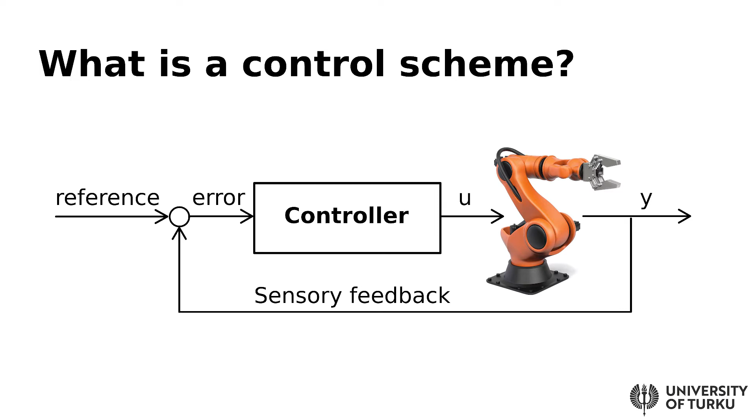The controller, by means of sensors, constantly monitors the robot's motion and compares it with the reference. Based on this difference, which we call error, the controller defines the electrical signals that should be sent to the robot's motors in order to allow the desired motion to be performed. That's how the trick works.

But let's take a look at this specific case. This type of robot usually works in what we call a well-structured environment. It performs repetitive tasks, protected in a cage, without interacting with humans, and with almost no disturbances at all. I mean, here everything is well known, and there's no space for the element of surprise.

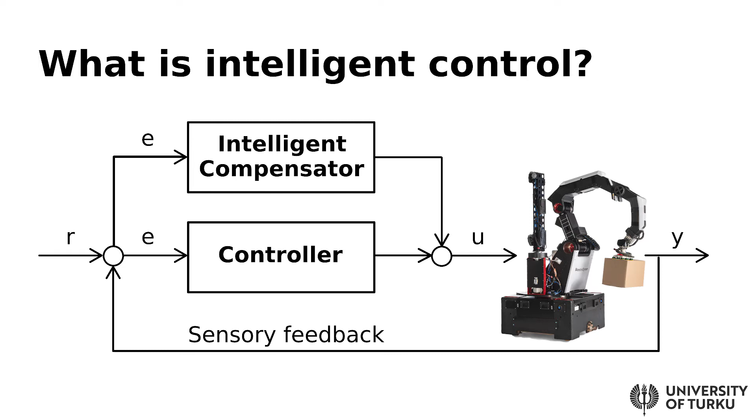Now, let's compare to what happens with Stretch, the new mobile handling robot for warehouses from Boston Dynamics. The robot will need to cooperate with humans and other robots as well. The cargo weight may vary widely. It means that uncertainties and external disturbances will be very common. Thus, in this case, conventional control schemes with fixed gains may fail to provide the required performance.

In this case, a more appealing solution would be the adoption of an intelligent compensation scheme within the control law to recognize and previously compensate for uncertainties and external disturbances that can arise. But in order to design an intelligent controller, first we need to understand what intelligence is. Unfortunately, there's no consensus about that.

According to Rudolf Pintner, intelligence is the ability to adapt oneself adequately to relatively new situations in life. Walter Dearborn, on the other hand, stated that it is the capacity to learn or to profit by experience. And recently, the neuroscientist Rodolfo Llinás claimed that prediction is the ultimate function of the brain.

Let me now try to put it within the control systems framework in order to highlight the required features of an intelligent controller. The controller must be able to adapt itself to changes in the plant. It should learn from experience and acquire knowledge by interacting with the environment. Adaptation and learning allow the controller to improve its ability to make better predictions about plant dynamics and to improve the overall control performance as well.

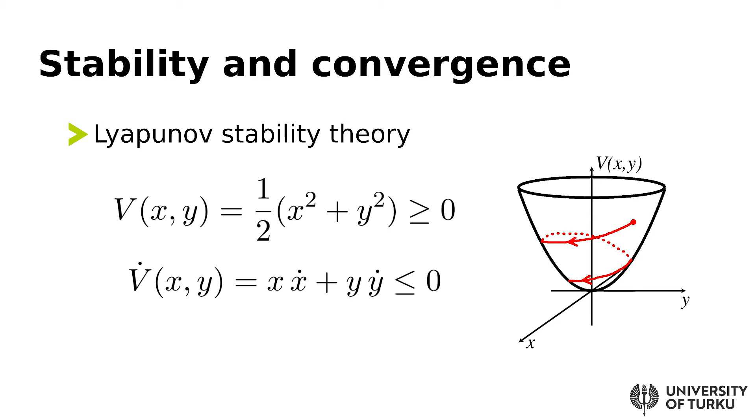In my research group, we usually take advantage of the nonlinear control theory to design our intelligent schemes. By means of the Lyapunov stability theory, we don't need to linearize the plant, which allows our controllers to deal with a wide operating range. Sliding mode control, for example, can be easily combined with artificial neural networks and other machine learning algorithms to implement an intelligent controller. Sliding mode theory was conceived and developed in the former Soviet Union.

The main idea behind the method is to transform an nth-order trajectory tracking into a first-order stabilization problem. This can be achieved by defining a stable manifold, the so-called sliding surface, and a control law to ensure the convergence of the tracking error to this surface. Once on the manifold, after the reaching phase, the sliding mode takes place and the error exponentially converges to zero.

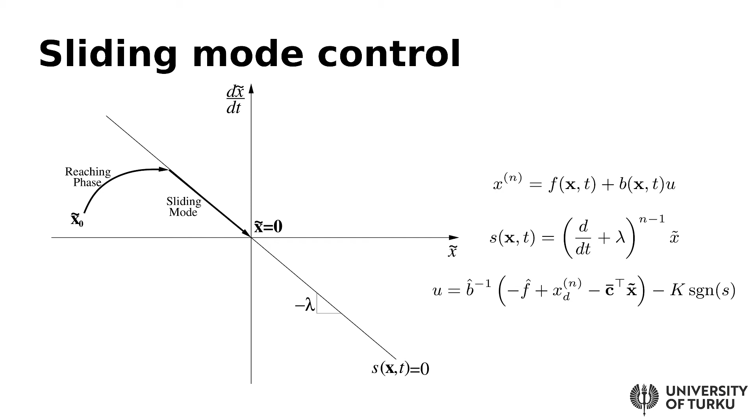Here, in the case of a second-order system, the sliding surface is a straight line. For a third-order system, it's a plane. For a fourth order, a hyperplane, and so on. So, the control law and the gain should be developed in order to achieve the so-called sliding condition, which is a Lyapunov-like stability criterion that ensures the sliding surface attractiveness.

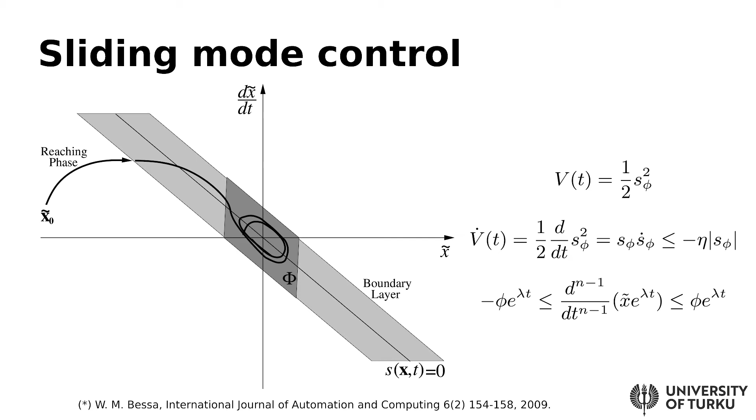But a known drawback of conventional sliding mode controllers is the so-called chattering phenomena, due to the discontinuous term in the control law. In the case of mechanical systems, chattering should be avoided because it can excite higher vibration modes. In order to avoid undesired chattering effects, a thin boundary layer neighboring the switching surface may be adopted by smoothing out the sign function. This can eliminate chattering, but spoils the tracking performance, which in fact means that a steady-state error will always remain.

In order to overcome this major drawback, a few years ago, I proved that actually the error converges to a closed bounded region. I don't want to bother you with the mathematical details of the proof, but the first part relies on a Lyapunov-like stability analysis, and the second one on the solution of a set of differential inequalities. It means that now we can propose our intelligent compensation scheme within this convergence region without compromising the overall system stability.

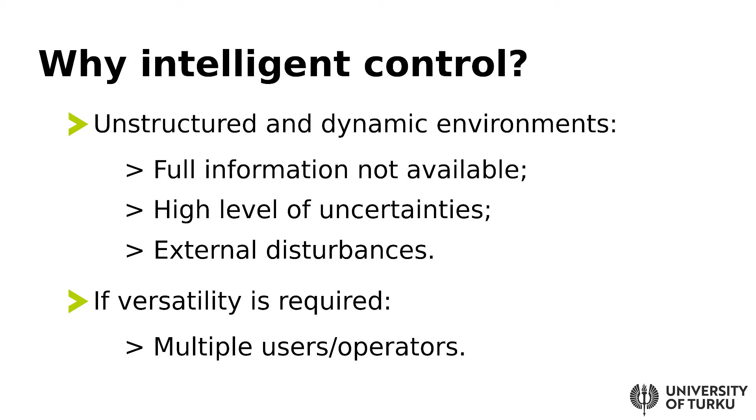And when do we need intelligent controllers? I know that many control engineers and many companies use conventional controllers like PID, for example, and in fact, you can still use it for many applications. However, with the expansion of the fourth industrial revolution, the demand for more embedded intelligence tends to increase.

And it happens because when interacting with us, these devices work in an unstructured environment and are subject to uncertainties and external disturbances. Mobile robots, for instance, may bump into other objects and even into humans, which of course we need to avoid. In addition, since users are typically different, devices need to learn and to adapt themselves to each individual. Before introducing some obtained results, let me show you a brief comparison between a conventional and an intelligent controller.

For example, let's compare a PID controller to an intelligent scheme designed as a neural network embedded in a sliding mode controller. First of all, I would like to highlight that the operating range of our intelligent controllers is much wider. Since the entire controller design is based on nonlinear theory, the intelligent scheme is not limited to work in the neighborhood of a set point.

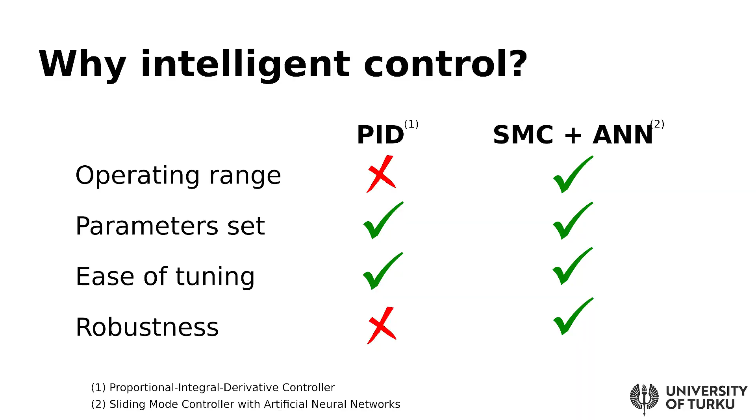Tuning the control parameters in both cases is easy and straightforward. From the point of view of the final user, I mean the person that will tune the controller, the size of the parameter set in both cases is also comparable.

Finally, the intelligent controller can ensure robustness over a wide operating range, which cannot be achieved using PID control. Let me now show you some applications with intelligent control. The first one is the intelligent control of a mobile robot. In order to provide the adaptive, learning, and predictive features, the controller was designed as a nonlinear scheme with an artificial neural network embedded in it.

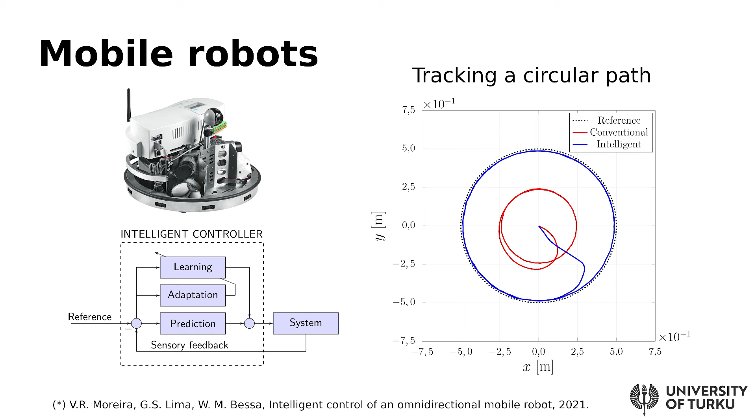As we can see in the graph, due to the ability of the artificial neural network to identify and to compensate for friction, the intelligent controller, the blue line, shows a much improved performance and allows the robot to track the desired circular path, the dashed line. The conventional controller, the red line, fails to track the path, as we can see.

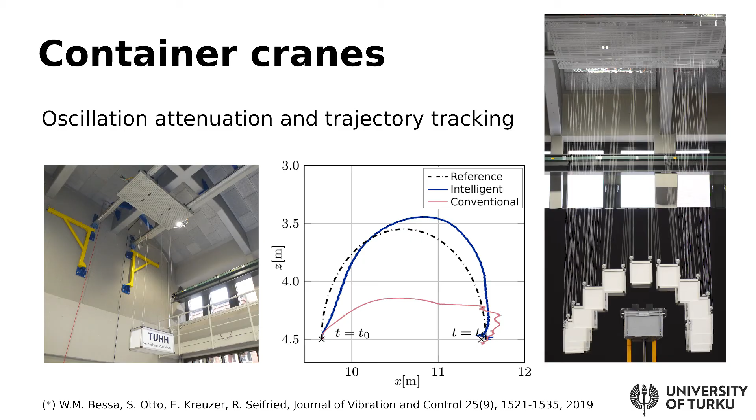Together with my colleagues of the Hamburg University of Technology, we have applied the intelligent controller to an overhead container crane. This is a typical underactuated mechanical system, and we have assumed we don't know exactly the cargo weight. Here, for example, the container should track a desired path without oscillating in order to avoid an obstacle. And once again, we can see the much improved performance of the intelligent controller in the blue line. The conventional controller, the red line, wasn't able to cope with the task when the system is subject to a high level of uncertainties.

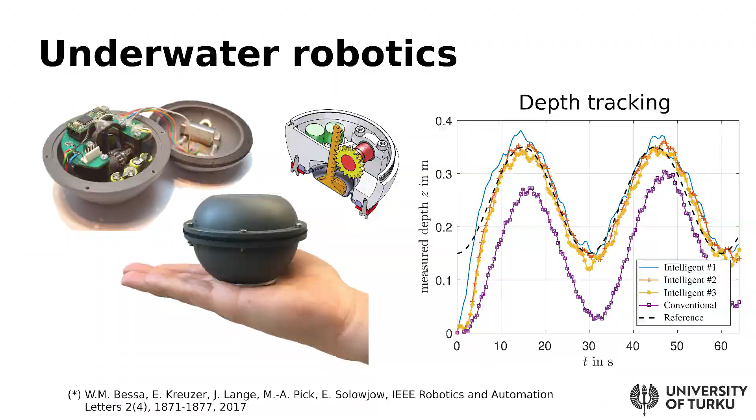And we have also applied a similar scheme for the intelligent control of underwater robots. In this case, the learning feature is essential for the controller, because the intelligent scheme should be able to learn about the hydrodynamic effects, the added mass, the hydrodynamic damping, in order to compensate for it. I specially selected this application to show you that our intelligent controllers don't need powerful hardware and can be easily deployed in tiny microcontrollers. Devices like that can be used to explore ocean phenomena or even inside industrial tanks for monitoring chemical processes.

The next application I would like to show you is the intelligent control of an electrohydraulic actuator. Electrohydraulic systems are widely employed in robotics and automation. They are able to keep the load capacity without heating. That's what happens with electric motors.

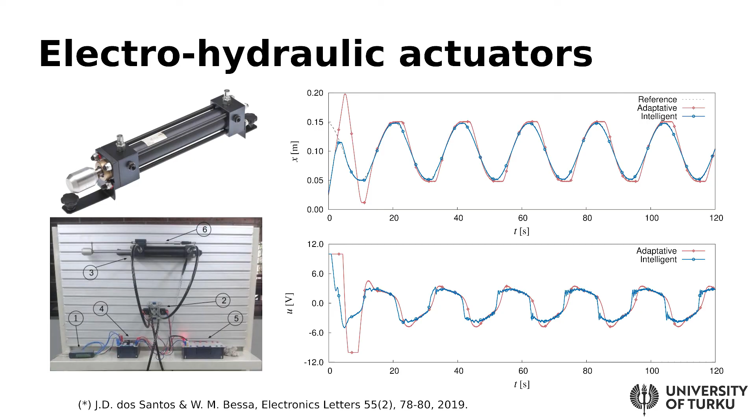This is, of course, a nice application, but actually, I included this slide to emphasize the difference between adaptive and intelligent control. An adaptive controller has no memory, so it always needs to adapt, even if it has already experienced the same situation before. An intelligent controller, on the other hand, is able to learn by experience, providing an improved performance with less effort.

I would also like to show an ongoing research that is being carried out in cooperation with the Federal University of Rio Grande do Norte. Our goal is to propose a reliable controller for an artificial pancreas, and it must be able to deal with all intrinsic uncertainties of this type of problem. Intelligent control has a huge potential to be deployed in smart healthcare devices like that. As we are not machines, our body dynamics is very uncertain, which poses a perfect scenario for the application of intelligent control schemes. We are still at the beginning of this research, but the obtained results so far are very promising.

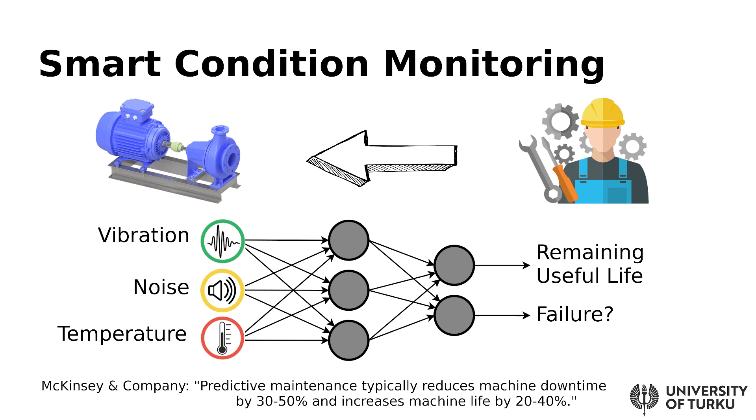Finally, what about my future research perspectives? In addition to my research on intelligent control of mechatronic systems, I'm also very interested in the application of machine learning to smart condition monitoring and to predictive maintenance. According to McKinsey & Company, for example, predictive maintenance typically reduces machine downtime by 30 to 50% and increases machine life by 20 to 40%.

Considering that the price of smart sensors and edge devices has dropped dramatically in recent years, smart condition monitoring and predictive maintenance have the ability to increase companies' productivity and competitiveness. This is something that I want to start investigating here in Turku, and maybe we can do it together with your company.

So that's what I would like to show you today. If I succeeded in drawing your attention to the advantages of intelligent control or to any specific application and you want more information, please do not hesitate to contact me.